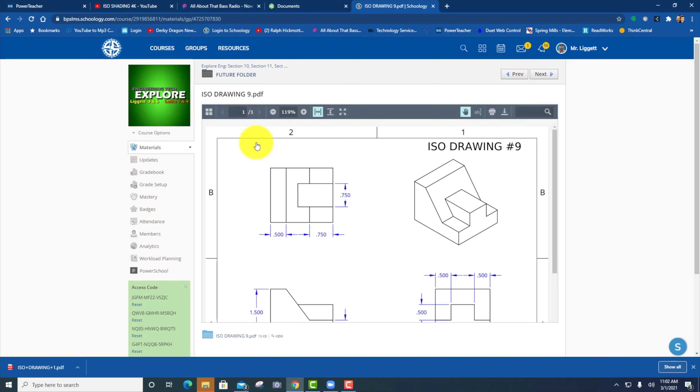Okay, so we're ready to draw isometric number 9. We're going to go to our folder where the PDFs are, and click on number 9. This is isometric number 9. I'm going to click on the magnifying glass.

Click fit to height, and so I'm looking at this. I think this one's a pretty easy one to do in 2 extrusions. So I'm going to draw this shape in the front view without this part right here, and then I'll add that later. I'll draw this shape, then come in the right side view and draw that shape going in. It's 2 inches wide, then up a half inch, up 1.5 and forward a half inch, and this distance right here is 0.75. Then we'll find all of those, and that'll give us our angle.

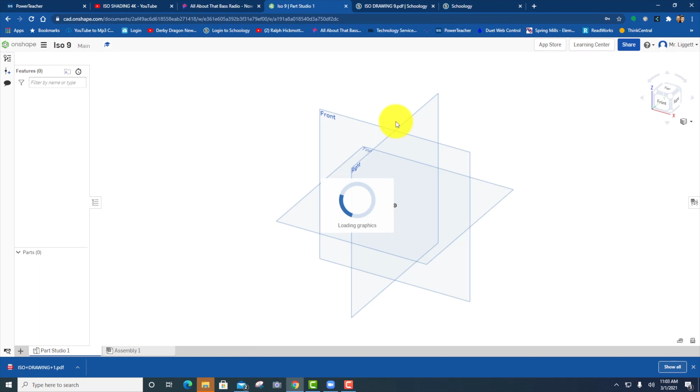Okay, so I'm going to go to create new document. We're going to call this ISO 9. Just like all of them, I go up to the 3 lines, and I make sure my workspace units are in inches. I'm going to do a sketch in the front view, and look at the front view.

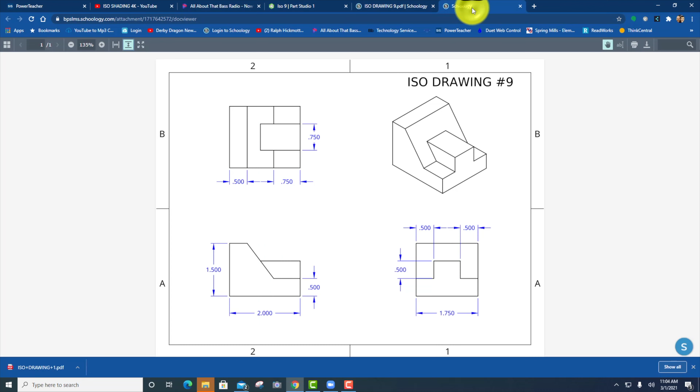Now what I want to do is choose the line, and go forward. This was 2 inches, so I'm going to type in 2, enter. Then I'm going to go up 0.5. I'm going to go back 0.75, and then stop.

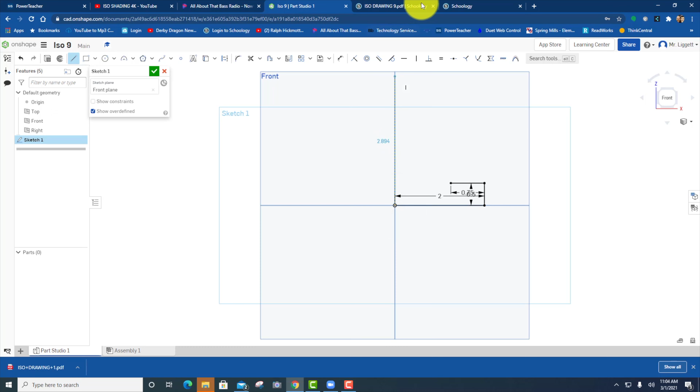I'm going to click the line again, and hit escape to stop the line command. I just click on a new line, and go up. It was 1.5 and then forward 0.5. So up 1.5, forward 0.5. And now all I have to do is connect the dot right there. So that is the shape that we were discussing.

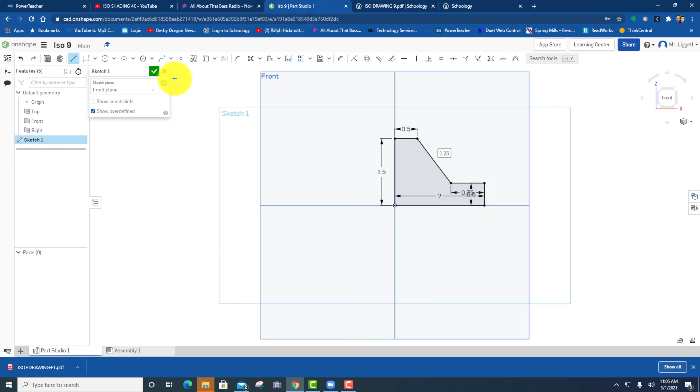So I'm going to go ahead and hit the check mark. I want to see this in 3D before I extrude it, so I can tell if it's right. I'm going to extrude this shape. Now, I tend to like to push it the other direction - I like to think of the face I drew as the front view.

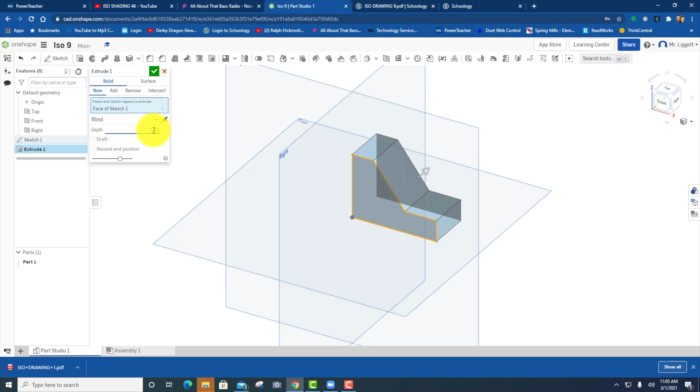So I click on this arrow, and it'll flip the direction it's going. And I want this to be 1.75 wide, so I'm going to change this to 1.75. Okay, that looks good. So now I just have one more extrusion. I'm going to choose this front face, right click, and say new sketch. I'm going to look right at the right side, and draw a rectangle right here.

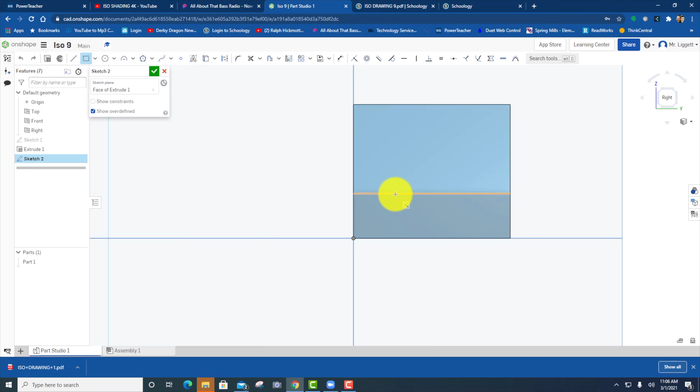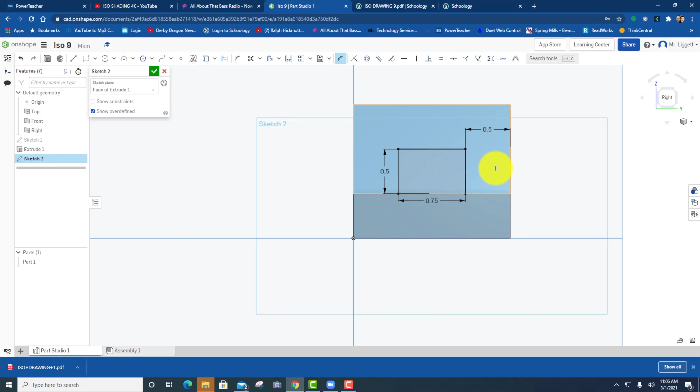Now this rectangle is going to be 0.75 wide, and 0.5 tall. Now it looks right, but the distance between here and here is a little smaller than between here and here. That tricks people - you think you've got it right, but you have to add a dimension here. You can see I was almost 0.5, but I wasn't perfectly 0.5. So when I add that, now I know that this is 0.5, this is 0.75, and over here is 0.5. So it's ready to go.

So I'm going to hit the check mark, and go into 3D view. This is my profile that I'm going to extrude. So we're going to click extrude this shape, and I want to flip it so it's going the opposite direction.

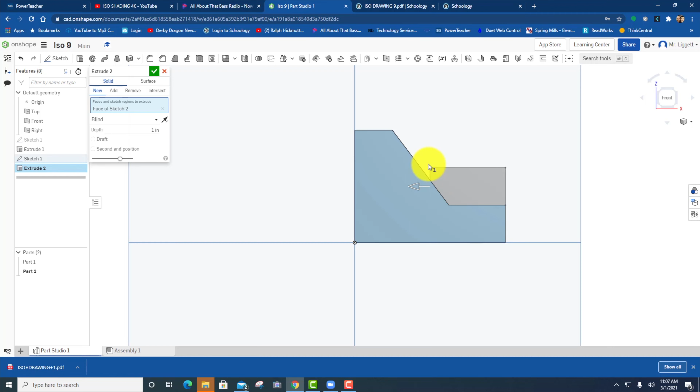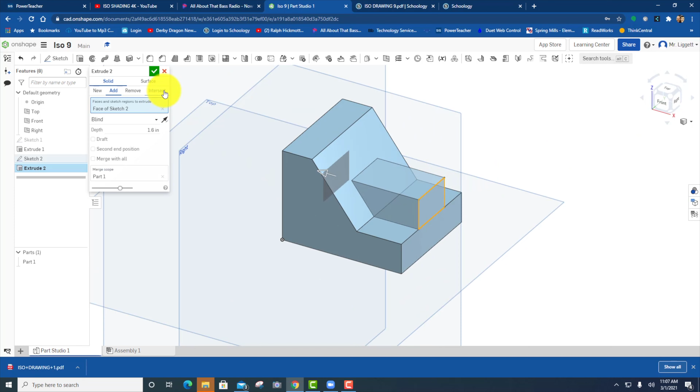Now I don't know exactly how deep this one needs to go, but if I look straight at it from the front view, I can tell it's not there yet. I can actually grab this arrow and drag it until it's inside - you can bring it right in like that, and now I know that it's good. Let's go back into the 3D view, make sure that it looks good. Yep, that looks good, and I hit the check mark, and there I have it.

Last step, go to the plus sign, create drawing. We want custom template, do not include title block.

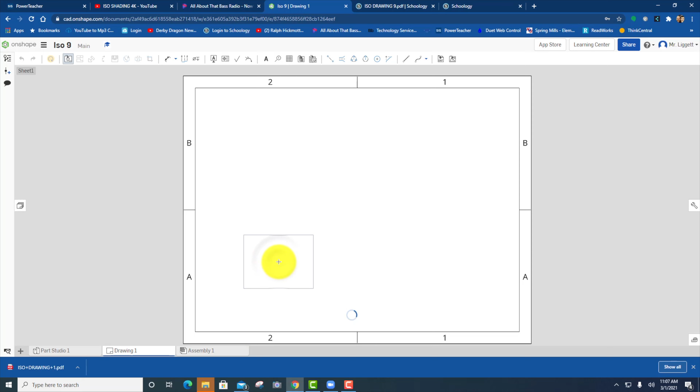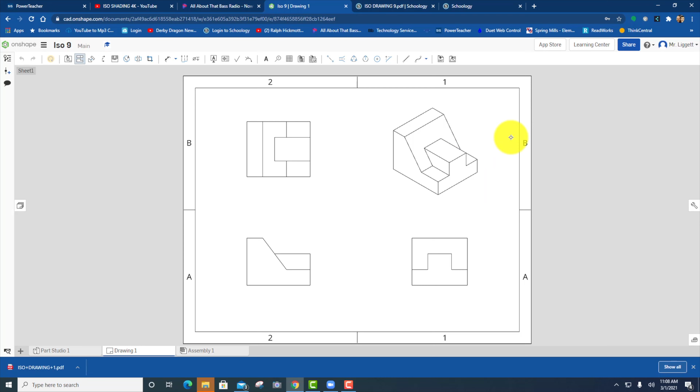Okay, my part, I'm going to put in A2, the bottom left-hand corner. My right side view, I'm going to put in A1, the bottom right-hand corner. Click on the front view to make your top view in B2. Click on the front view to put into B1, the top right-hand corner. Hit escape to exit the command. Right click, show shaded view for the isometric, and show hidden lines in the three other drawings.

Last step, go to the note, and in the bottom right hand corner, stretch this out a little and type in your name in all caps. Hit the check mark, and number 9 is finished. Now it's your turn.